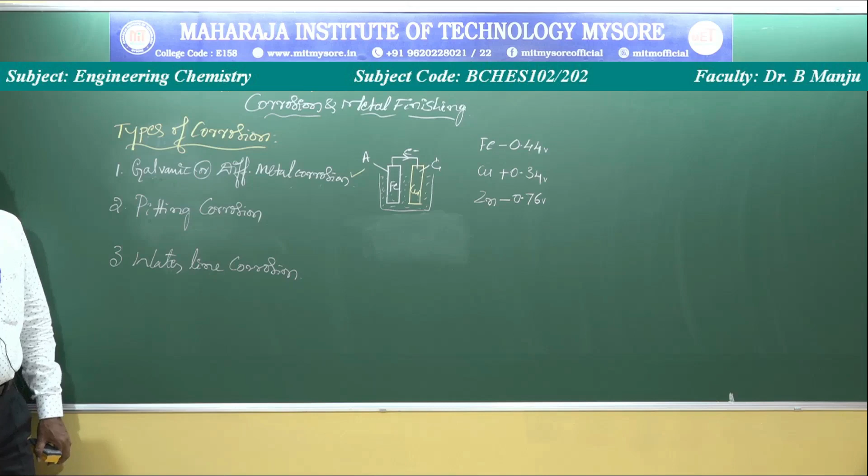When electrons transfer from one electrode to the other, or jump from anode to cathode, it develops some potential difference. That is why the galvanic cell forms. Due to formation of the galvanic cell, one of the metals undergoes corrosion, that is called differential metal corrosion or galvanic corrosion. That is about galvanic corrosion.

Next we go for pitting corrosion. Pit means hole. Pitting corrosion takes place only when a pit or hole is created on the surface of the metal. For example, a window rod, that is an iron metal. Now some dust particles are deposited over here. This type of corrosion, where a pit or hole is created on the surface of the metal, is called pitting corrosion.

That is explained on the basis of the differential aeration theory of corrosion. On the basis of the differential aeration theory, you can easily explain pitting corrosion as well as waterline corrosion. In the previous class we were discussing the differential aeration theory and electrochemical theory. What is the concept of differential aeration theory? Less oxygenated surface always acts as anode, more oxygenated surface always acts as cathode. That is the concept. Now you can apply that.

Pitting corrosion can easily be explained by using differential aeration theory. Dust particles are deposited over the surface of the metal. Below this dust particle, oxygen concentration is less compared to this. This is more exposed to atmospheric oxygen, this is the more oxygenated area. Therefore, this acts as cathode, and where oxygen concentration is less, this portion acts as anode.

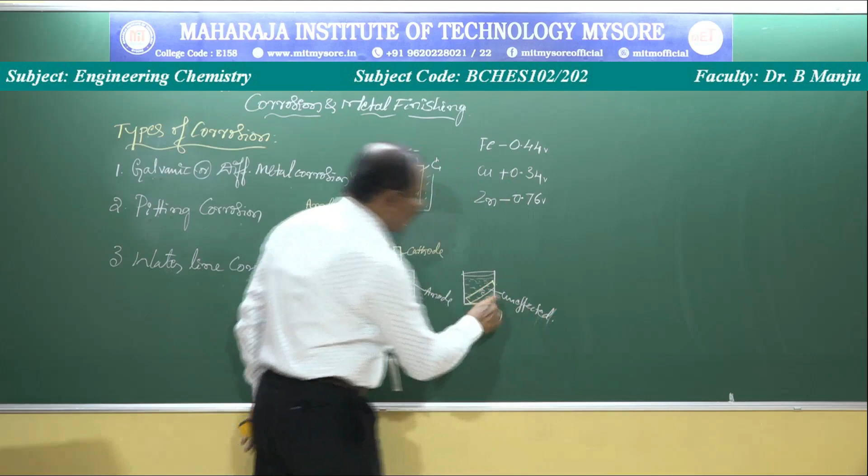As per the differential aeration theory of corrosion, we can easily explain how pitting corrosion and waterline corrosion take place. In this case the metal completely immersed in the water is unaffected; it does not undergo any corrosion, it is free from corrosion, because inside the water the dissolved oxygen concentration is uniform. There is no difference in oxygen concentration. Therefore, this metal does not undergo corrosion.

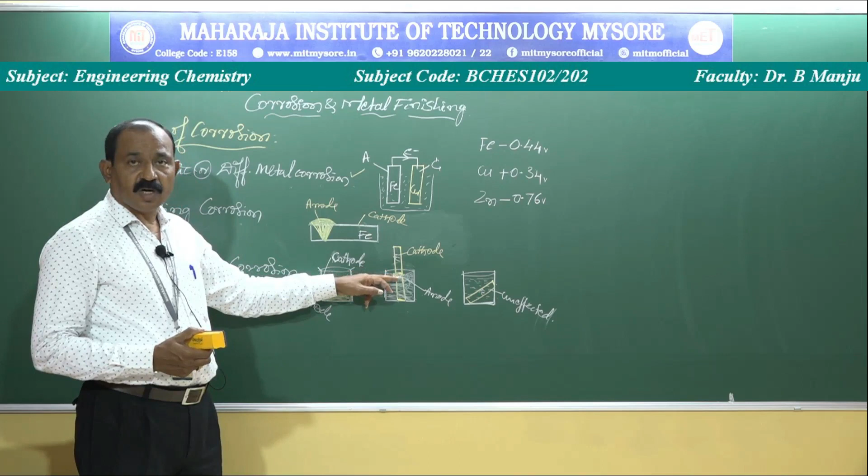We can observe that when completely immersed inside the water, the metal is not affected. When half a portion is immersed, it starts corrosion. When it is completely immersed for a long time and then exposed to atmospheric oxygen, either some portion or the complete surface undergoes corrosion. After some time, maybe 24 hours or 6 hours, you take it out and expose it to atmospheric oxygen, and the whole surface undergoes corrosion.

This type of corrosion we call waterline corrosion. This type of corrosion we call pitting corrosion. If you consider two different metals, one of the metals will undergo corrosion; that we call differential metal corrosion. That is about types of corrosion. In general, they are classified into dry and wet. Further classification: galvanic or differential metal corrosion, pitting corrosion, waterline corrosion. There are some others, stress corrosion, boundary line corrosion, but these three are important; you have to understand these three now.

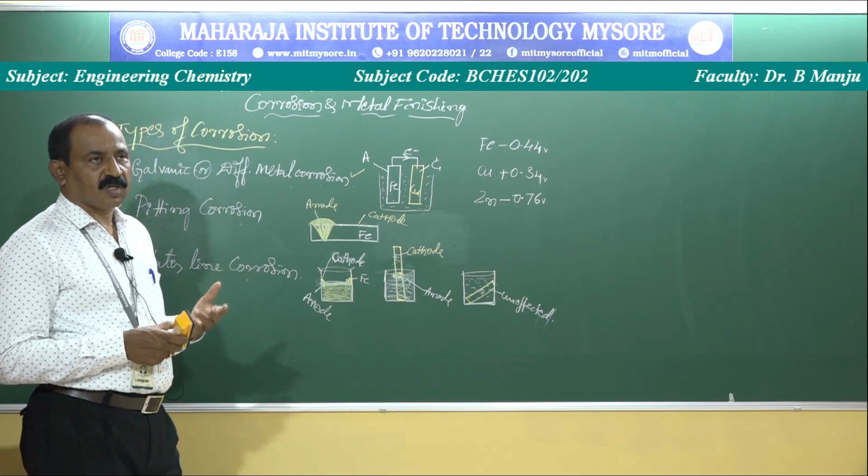Next I'll go for factors affecting the rate of corrosion. What are the variable factors that influence the rate of corrosion? There are 5 important factors, and I'll take up those 5 factors. We have understood the definition of corrosion, theories of corrosion, the concept of differential aeration theory, and types of corrosion, the 3 important ones: differential metal or galvanic corrosion, waterline corrosion, pitting corrosion. Then we come to the factors affecting the rate of corrosion.

Factors affecting the rate of corrosion. Now there are 5 important factors. One is the nature of corrosion product. Second one is anodic and cathodic area. That is also one of the important factors. There are 5 important factors.

Third one is conductivity. Then pH. Then temperature. Now these are all the 5 important variable factors that influence the rate of corrosion: nature of corrosion product, anodic and cathodic area, conductivity, pH, temperature. Now let us take them one by one.

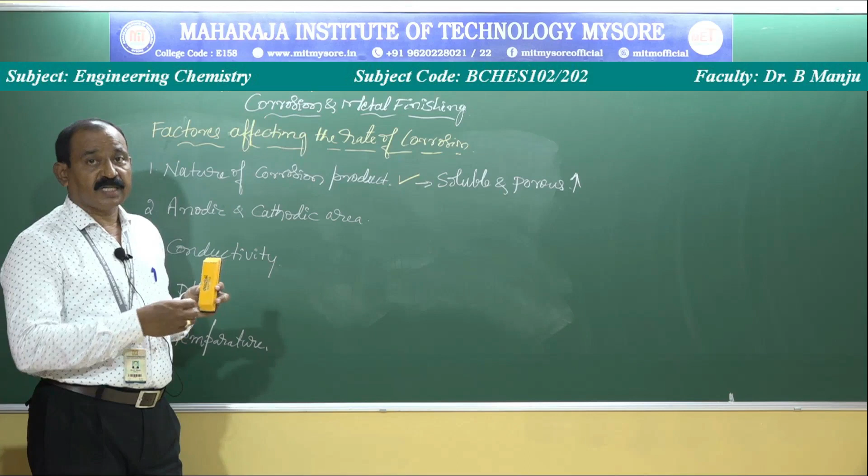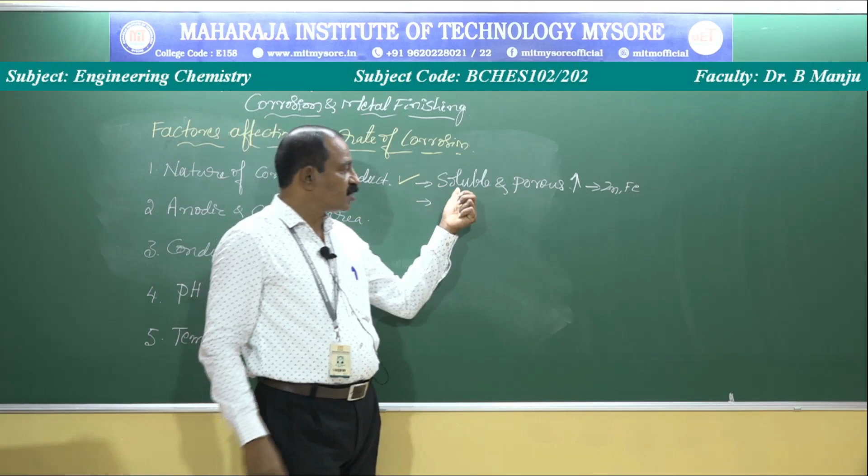For example, in waterline corrosion, corrosion starts in the center and the product, rust, is formed. When rust contacts the water, it dissolves. When it dissolves, the surface becomes free and undergoes further corrosion, which indicates the rate of corrosion increases. Suppose some metals, for example zinc or iron, undergo oxidation and the products are highly soluble and porous, then the rate of corrosion increases.

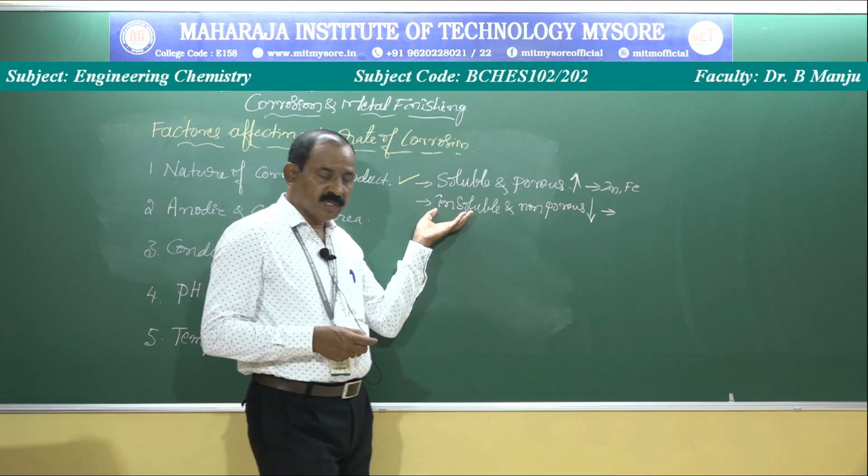Then what about insoluble? Suppose the product is insoluble and non-porous, then automatically the rate of corrosion decreases. If the primary product of the metal is insoluble in water and non-porous, the rate of corrosion decreases. Soluble and porous, the rate of corrosion increases.

These are the examples of metals with non-porous and insoluble products: titanium, chromium or molybdenum, etc. These metals undergo corrosion and form a layer that is insoluble in water and non-porous, so automatically the rate of corrosion decreases. This is the example of nature of corrosion product.

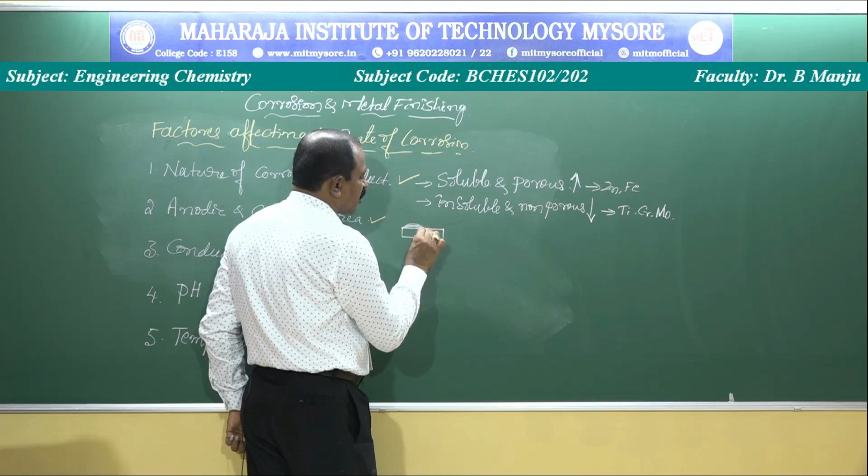Now I come to anodic and cathodic area. What you have studied in pitting corrosion is the best example to explain anodic and cathodic area. In pitting corrosion, on the iron metal, some dust particles are deposited over the surface. This portion acts as anode and the more oxygenated surface acts as cathode. Now I will draw the same structure.

Suppose here the same iron metal, with dust particles deposited. Now you see the anodic and cathodic area effect. Which one gives more corrosion? This is the anodic area and this portion is the cathodic area. In this case, the anodic area is less compared to the cathodic area, therefore the rate of corrosion increases. And vice versa: if the anodic area is more and the cathodic area is less, the rate of corrosion decreases.

How does it decrease? See that in the first case, the anodic area is very small. This portion undergoes oxidation and liberates electrons. All liberated electrons are accepted by the cathodic zone, because the cathodic area is larger, it receives the electrons and undergoes faster reaction. It is concentrated on the anodic area, therefore a pit or hole is created. Now the rate of corrosion is very high.

Similarly, if the anodic area is more and the cathodic area is very less, this portion undergoes oxidation and more electrons are liberated, but the receiving end, the cathodic area, is very small.

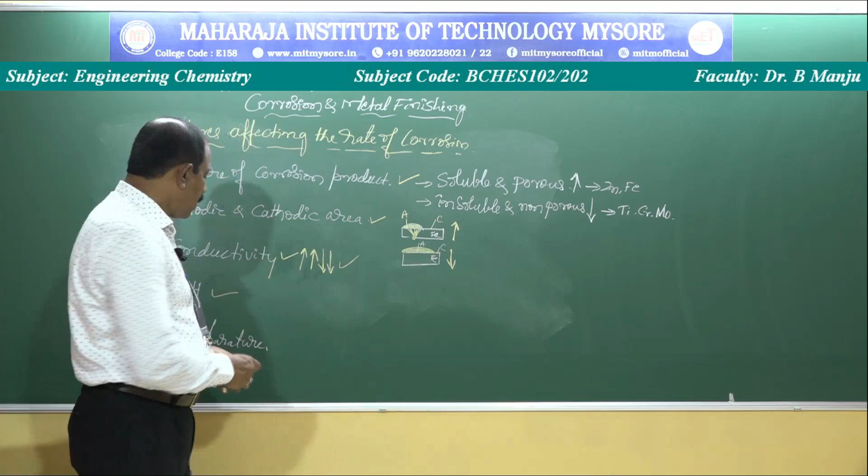Then I come to the pH. How can you define pH? pH can be defined as the negative log base 10 of hydrogen ion concentration, negative log of H+ ion concentration. That is the definition of pH. On the basis of pH, solutions can be classified into acids, neutral solutions and bases. Acids have a pH value between 0 to 7, or 6.99 like that. Exactly 7 is neutral, 7 to 14 is a base. Likewise, they are classified on the basis of pH.

Now, pH increases, basicity increases. pH decreases, acidity increases. When pH comes down below 3, the acidic condition is more. In acidic condition, the pH is very low and the rate of corrosion is very high. Severe corrosion takes place when pH is less than 3. pH decreases, rate of corrosion increases. pH increases, rate of corrosion decreases. In basic condition, the rate of corrosion is less compared to acidic. In an acidic environment, the corrosion rate is always very high.

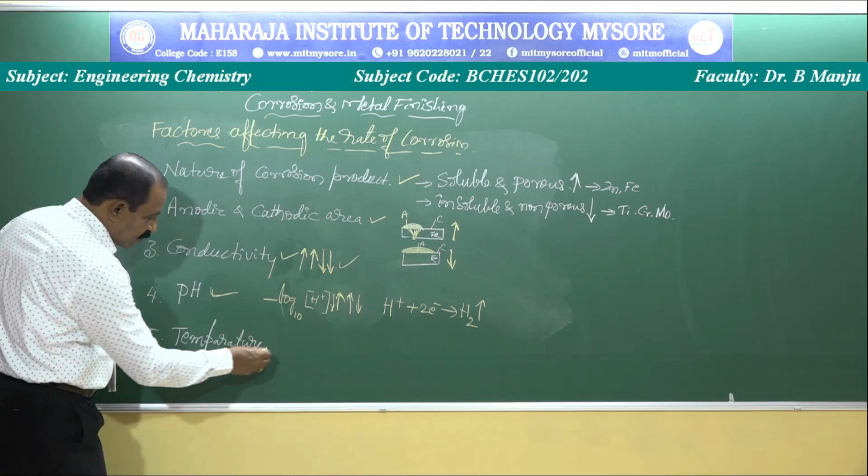Then I come to temperature. The last one is temperature. I think all of you know that in general, when temperature is high, the corrosion rate is also high. Rate of corrosion increases with increase of temperature. What is the reason? When temperature increases, what happens to solubility, conductivity or movement of ions, or viscosity? When temperature increases, in general solubility increases.

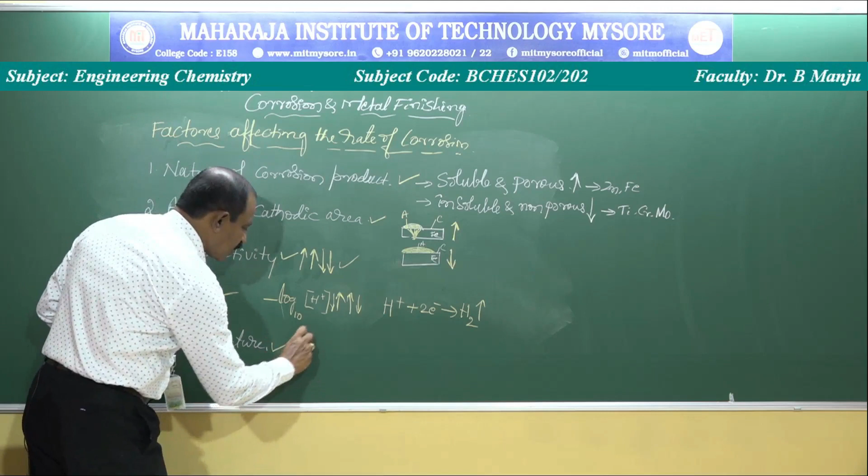For example, take cold water and put in common salt, sodium chloride. Add and dissolve it; some grams of crystals are soluble. Still you add salt, it becomes saturated and some salt remains. Then heat it up; when temperature is high, that salt dissolves. That indicates when temperature increases, rate of corrosion also increases. Temperature decreases, rate of corrosion also decreases. When temperature increases, solubility increases, and automatically the rate of corrosion increases. Conductivity also increases, and when conductivity increases, rate of corrosion increases.

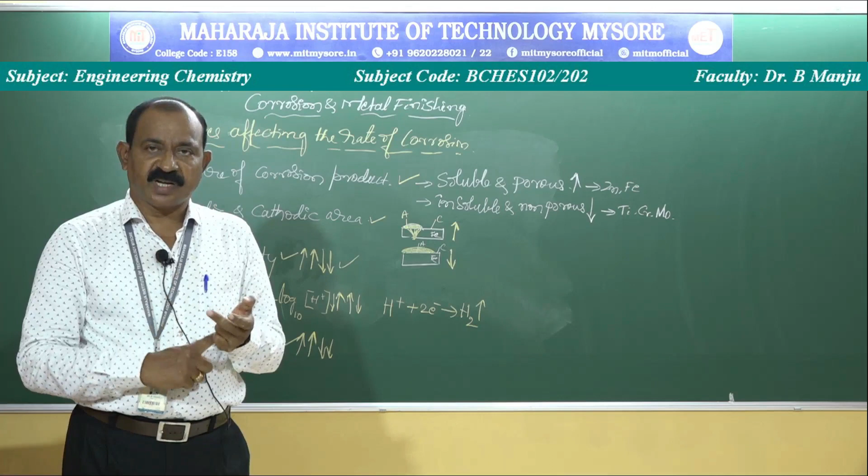The mobility of ions at higher temperature is more compared to lower temperature. At higher temperature, conductivity is more, mobility of ions is more, solubility is more, and viscosity is less; viscosity is inversely proportional to temperature. These are all the effects. Therefore, when temperature increases, corrosion also increases. When temperature decreases, corrosion decreases. These are the various factors affecting the rate of corrosion.

The remaining portion of this corrosion chapter, prevention of corrosion, we are going to take up in the next class. Okay. Now, that is about factors affecting the rate of corrosion, okay.